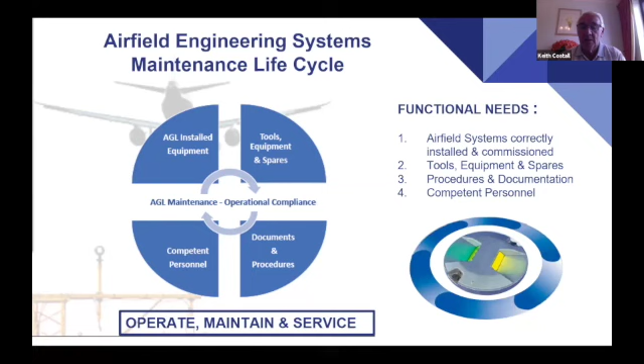Thank you for attending, and I'd like to thank Jeff. We're going to talk about a case study of Muscat International Airport, and I'd like to thank our CEO Sheikh Hayman and Abdulaziz, our airport systems manager, for allowing us to do this presentation and let everybody know what we do.

Just remember, Oman Airports actually operate 7 airports at the moment in Oman, all the civil airports. We're only talking about one of our airports, but this is basically the principle of all our airports. The first bit, what we're going to run through, are the topics we're basically going to go through in this presentation.

The regulator requirements - in our country here in Oman, it's CAR 139, Annex 14. That is our legal document. We're going to talk about our team - we've got a good team and we'll go through them. Some of the AGL tools that we use, which are critical for us to be able to do our jobs.

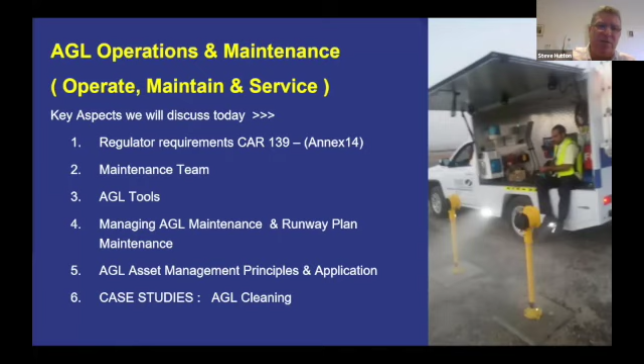Managing the AGL maintenance and our runway plan maintenance, how we do things, which we've changed from the basic principle we started out with 25, 30 years ago for assets. And the asset management system we use, the principles and how we use that to put everything together, which comes back to our documentation side later. A big bit on this presentation you'll see is cleaning, because that's actually one of the biggest jobs we've got - cleaning and making sure those lights are up and serviceable and up to standards.

As Keith has pointed out, I just touched on what he's mentioned - the AGL is important because it needs to be clear, it's actually visual cues. Very important, the cues for the pilots, making sure they see where they are on the runway. In low vis, smoke can be coming across, low cloud - there's many reasons why you'll have this, and it's very important that the visual aids are in the right place and working.

As the airport operator, it's our responsibility to make sure that's right. It's making sure the airlines and everything there is safe, so we can all travel from one place to another.

Okay, Muscat Airport. This is an outline of our Muscat Airport. We have the new runway, which was completed in December 2015, 4,000 metres, 60 metres wide. It's a code 4F runway.

So we have 747-800s come in weekly, Cargolux comes in, delivers, and moves on down to Mumbai, I think from Dubai. We have a resident 747-800. We have them regularly, and we also have the A380 coming in.

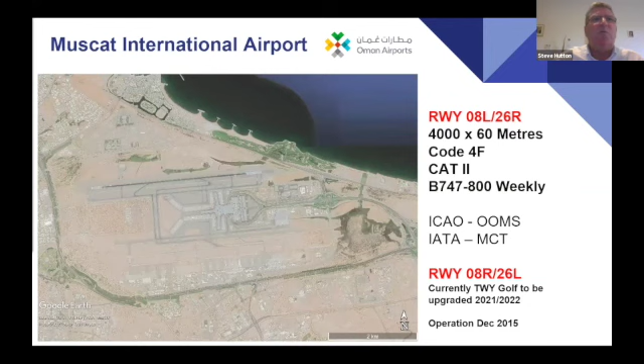This runway is planned, it's been converted to a taxiway at the current moment, and it will be upgraded because of things in '21, '22. So that's basically the runway, and our team looks after that and our taxiways.

Now let's go to compliance and all that. You'll see here, these are extracts out of the aerodrome manual. In there you've got to have your maintenance stuff.

Because of the size and detail of our airports, the complexity of things, we have a separate maintenance manual for all the maintenance we do. We pull that out, just put a brief description in the aerodrome manual, and all our detail sections are in there.

This is signed by our general manager, ADL, all the people go through it, and it's all signed, and the regulator goes through this. If we've got something not right, they tell us and we have to change it, and that's what we've done.

So clearly here, we just give a brief description. We have 24-hour, 24/7 operation, and we're just describing how we monitor in a very quick and simple way.

We have our airfield lighting control system, with individual lamp control on the taxiway fittings only, not on the runway fittings. On the runway fittings, on all fittings, you've got lamp fault monitoring on the CCR. So if one or two lamps go out, the current slightly changes, and we get an alarm come up on the screen.

On the screens here, we've got two screens: this one's the control tower, this one's where we've got the details of the CCR. Our guys can sit from the workshop and see everything that's happening on the actual airfield. They can see that, and it's all there as well, so they can do that.

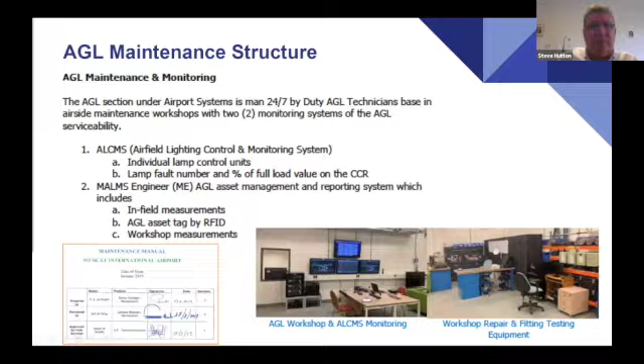Okay, our Muscat team. We have 4 AGL teams, each of 3 to 4 people. They mix around depending on who's on leave and everything like that. We have 4 shifts: A, B, C, and D.

We have 2 supervisors, and I'm very proud to say our supervisors were technicians. The company put some of them through to become engineers. They're now qualified engineers, and they've stepped into the supervisor's role, so they know exactly what's going on.

They've got that feel, they've got a good relationship with the team, and they all work together. The team are 24/7 coverage, 12-hour shifts from 6:30 to 6:30 on a daily basis. The supervisors generally are in the office during the day or out in the field, but they also cover nights. They've stepped in, and through this pandemic, we've had our supervisors covering day shifts and different things because of lockdowns. They are very versed, they know everything going on with the team, and they're an integrated part of it.

What our department or section does, we look after everything under Annex 14, including the apron floodlighting. Some of the boys think that's a pain at times, but every visual aid, we have to explain that to the regulator. So we take responsibility. That is the responsibility of our systems manager, and he delegates that down to the team.

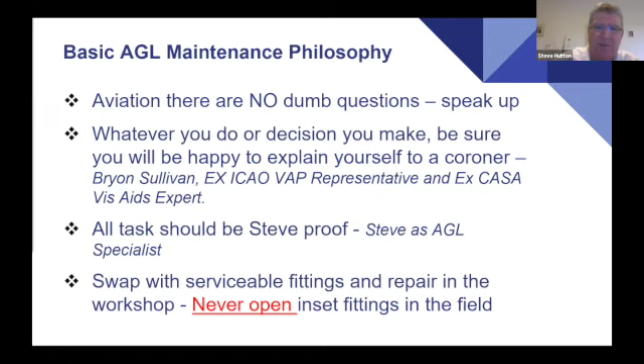The other bits we've learned over time, because we've had projects and contractors and consultants and management involved, we've had to learn some core terminology, and it's important.

Serviceability equals compliance. We talk serviceability, that the light is serviceable and it's up and functioning. The other thing we talk about is unserviceable - in one way it's non-compliant, but it means your fitting is not right or something's wrong. We keep it to those two terms and try to educate everybody that comes in. Just keep it to those terms, we know what it is, and we go through.

So what do we target our strategy at? Generally a lot of people will try and target about 70%. But what I've found is if you target higher, you'll actually do less work in the long term, because you're catching things before they get worse. At 80%, it's generally cleaning - the biggest thing in keeping your runway serviceable is keeping it clean.

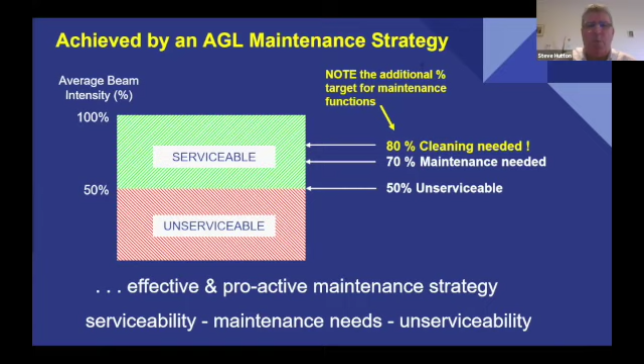We have a number of factors, we'll go through that in a moment, but that's what you need. Cleaning is the big bit. The electrical side is a small part, but to keep it serviceable, it's the cleaning of it.

Our AGL maintenance planning - so coming back here, the AGL preventative maintenance is based broadly on a monthly technical inspection. We're the technical guys, our ops guys go out there and have a look if there's something in between. When we go out there, our boys are checking that it's technically right, running and functioning correctly.

So all our services are generally checked across the board every month. We go through every calendar month and check it. However, our runway and stop bars are done on a weekly basis because they're critical pieces of the system - the pilots rely on it. So we do inspections and record them, where the guys go out and go down the field to have a look.

They will generally do this in their workshop vehicle, and if they can stop - which we do have more these days - they can go there, fix the light, correct it, record it in our asset management system, and move on.

This is all included in our maintenance manual, which provides the general details of what we do, and it all follows from there. So your team has got to know what your maintenance manual is - your regulators will ask you these questions, so you've got to make sure they're familiar with the maintenance manual and go from there.

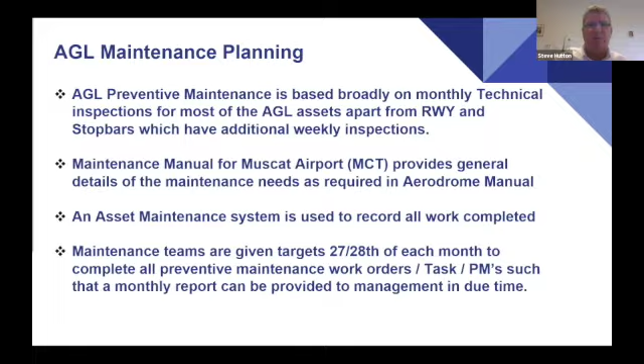We can then talk to management. Okay, the monthly tasks - visual inspections. The boys will go out and do a visual inspection. You need to go out, drive around and have a look at it.

We run two visual inspection types - we have a runway inspection and we also have a stop bar inspection. The runway inspection, they go out, run down through the approach lights, go onto the runway, check the PAPI and then drive down the other end. So we go from approach light to the runway end on the whole runway and we record any defects, any lights outage, anything there. They can swipe that and record it into the document.

It usually takes around 7 to 10 minutes. If there's a few issues, it'll take longer. They can also do the lead-on and lead-off lights and record all that because they're critical, they're part of that runway. The lead-off lights, you've got to get your aircraft off the runway. So those things are all sat there and they can record it and we document it.

The other thing we do in our monthly task is an infield measurement - we do our infield measurements of the runway and the stop bars every month and we record that and document what they are. If the service is not 100% or there is something there, the boys will go out and correct it and then record that it's correct. So there's a document showing - because one thing the regulator always asks us is how do you fix things. Well, this is where you're able to demonstrate this is where we found it was faulty or not serviceable, and we've corrected it in 2 hours, 4 hours, 2 days, whatever the appropriate reason. So it's there, we do that.

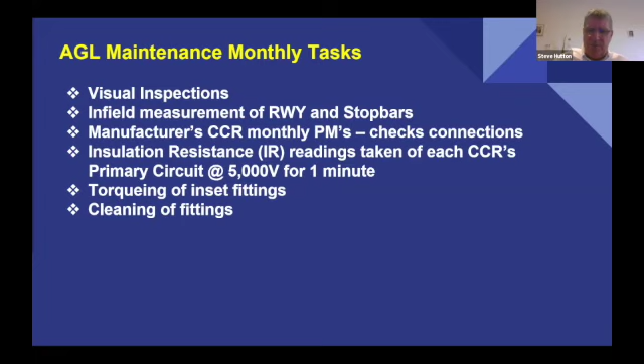Cleaning, as I said, is the big job on the whole lot - cleaning the fittings. Because we're in the Middle East, dust is a big problem for us. Very surprising, the dust builds up very easily, on our cars and everything around the place. So the boys go out and clean everything. We have a couple of photos.

The other thing is rubber - rubber on our centre line and TDZ. And the one thing a lot of people forget is the lead-off lights, which get a lot of rubber build up. We've now bought a new machine to deal with that. It was being done by hand, but the results look a lot better now because of the mechanism we're using for rubber removal. The boys can go out nice and easy and do that.

The other big thing a lot of people don't realise is the fittings - your inset fittings and even your elevated fittings. You'll get moisture inside the fitting, which puts a fogginess onto the glass lens, and then you've got to clean it. So your light deteriorates - we see the light deteriorating and your readings going down. If you clean the fitting, it fixes it.

When I was at Sydney doing the runway there, we just swapped the heads. The elevated fitting, we just swapped, put a new head on top of it, kept the original lamp, tested it, and that was fine. We'd pull them back, pull them apart, clean the bullseye to increase your 10,000 candelas. If it's an inset fitting, we crack it open, clean the inside of the lens and the dichroic filter, and sometimes the back of the reflector if it's a reflector lamp. Give that a clean and wipe, build it all up, and put it back together.

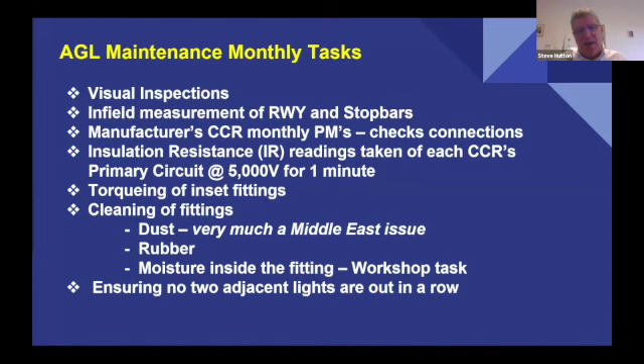We're conscious of doing that, and we tackle it on a weekly basis - the guys are doing it weekly, or just less than a week, because they're doing 4 days on, 4 days off, with 2 day shifts and 2 night shifts. So they're cycling through, doing the inspection down the runway on a regular basis - it's done a couple of times actually on the runway. Each shift does it, and we make sure it's covered and we're right there.

All the tools we get from the manufacturers are useless. Because of the dusty environment, we use a battery-operated Makita air blower. We recently got the new powerful one, which seems to blow a lot better.

We're finding that's good for blowing water away and clearing ducts, so the boys have been doing that. With a paintbrush, you can sweep around the base of your shallow pot and the lid to get the dust out, so when you're putting the fitting back in, there's no dust or anything loose. We also use rags for cleaning.

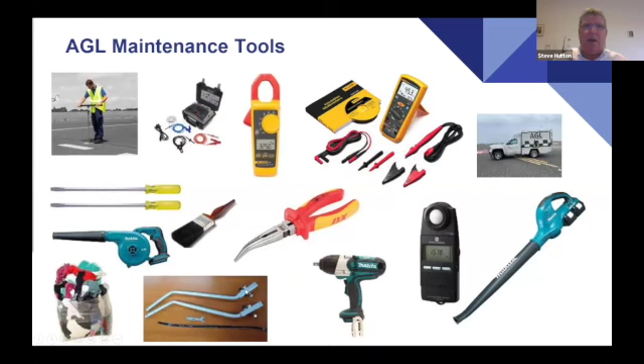And of course our lux meter for the apron floodlighting meter task. So these are some of the maintenance tools.

To the right there is our AGL workshop vehicle. You'll see about a third of the width of the van is a workshop bench. We look at the appropriate tools - the yellow thing on the right hand side is a Karcher blower for cleaning the lights.

We have a hand washing basin in the vehicle. You'll see on the centre taxiway line there, the tech is undoing it - we've got it on a 1.2 metre extension, undoing the nuts. We're conscious of HSE and backs - bending over and getting low, we find this is easier, as well as having the torque wrench on the long extension. You've got to look after your staff and think about the back mechanism as well.

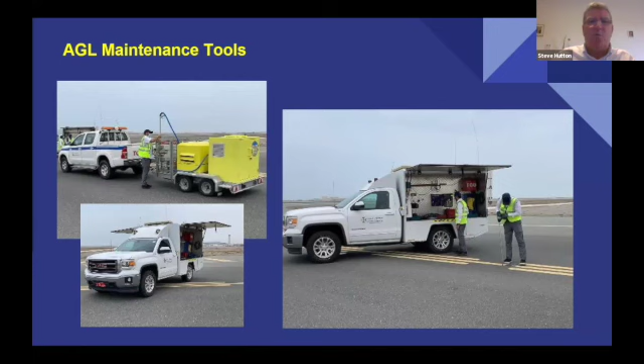We also have infield measurement equipment, so we can go down and measure our lights and get that information and data - the inset, the elevated, and with the transverse we can run across and quickly do thresholds and stop bar lighting.

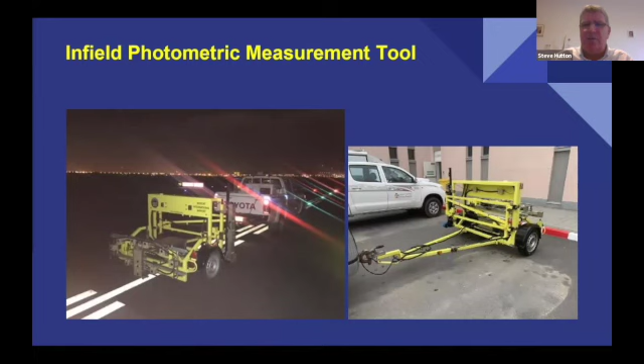Okay, now on to the cleaning. We clean the approach, the runway ends, the runway centre line, the TDZs and such. You'll see that Hitachi with the blaster - they blow and wash the signs or whatever.

The guys drive around on the vehicle - they sat down instead of getting out of the vehicle and back in the car. They've developed a way of doing this and moving around. We followed this from our guys in Salalah - this is how they were doing it, so we adopted the same approach through the airports.

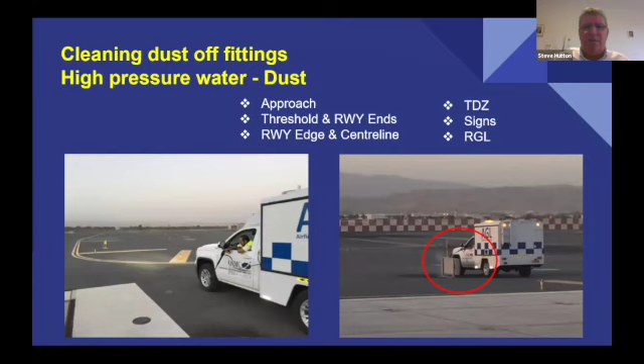We also do the elevated inset fittings - we run along slowly while they do the cleaning, and we've got rubber removal out there cleaning the rubber off the lights. The rubber removal for the runway does not touch the light fittings - they drive around it just to make sure they don't damage it.

Our civil guys have got a little bit of fear, but we're happy, and we clean it so we have no issues with that.

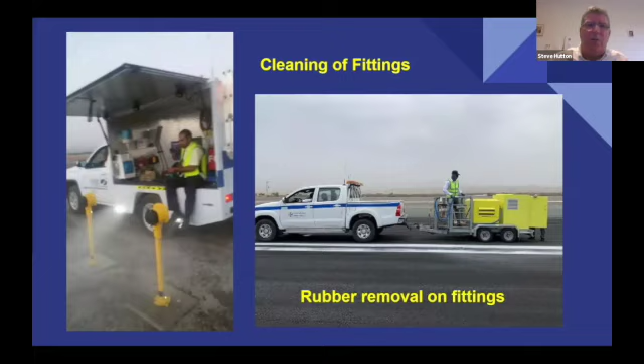Of course, you always have reactive work and whatever - you may have to go out and fix a broken cable, low resistance, or whatever. So here's the team in the old part of the airport repairing some cables where we had an issue and modification needed.

You'll see the AGL vehicle has got a cover, which gives the boys shade. If it's raining or whatever - we don't get that much rain - it gives us automatic shade so we can get in there, and it does make a hell of a difference.

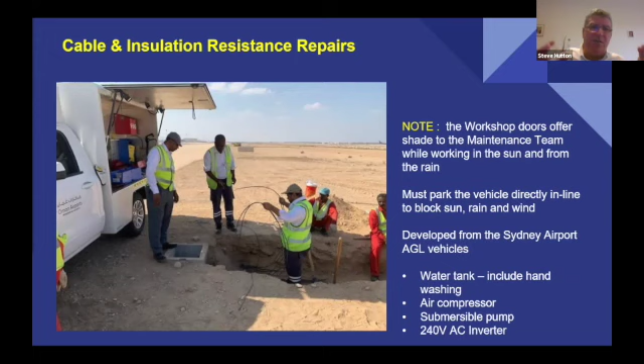Our vehicle has got a water tank for hand washing, air compressor, submersible pump, and 240-volt inverter. So our vehicle is used and sits there and tackles it, and we're ordering another one. Management have said we can have another one, and they're in the process.

This is the other side. We have the trays where all the light fittings are stored. We keep just enough for what the boys will need so they can go out, as one of the guys, a foreman at Sydney Airport, used to say, at 2 a.m. in the morning you can't go out and buy everything. So we make sure we have everything in the vehicle. The guys go out and do the job once and go back out.

Prior to the pandemic, we were quite busy. We had small slots - through the midnight you'd get a half an hour slot. So we made sure everything's there, and we do that. This philosophy has worked for us quite well.

Our contractor who was doing the project upgrade works got one as well - we made them do it. They can lock the door. The beauty there is they put the thing in, shut the door, and they can vacate. You're not worrying about tools falling out and everything.

One big problem we had with contractors was them just throwing that in, so we made them do a workshop. So there's another concept - it's just a box on the back of the Toyota, and they just shut the door, same principle. One side is the workshop, the other side is the drawers with their bits and pieces. And if you open up the tray in that one, they've got a big tray where they were carrying all their transformers.

The other one is reactive maintenance. You always got to be ready for your reactive maintenance. Reactive maintenance can be different things - as you can see here, we've got a damaged base. The question is, do you have a team that knows how to replace things?

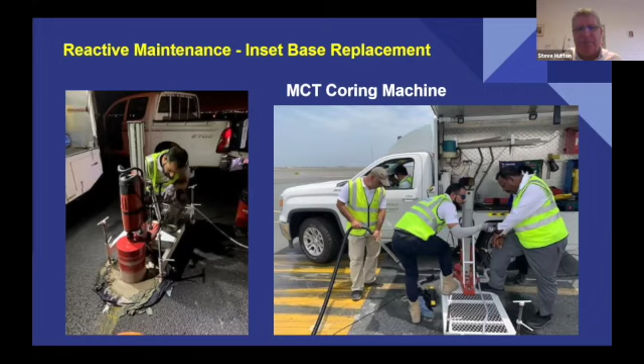Another big thing you've got to watch for, reactive maintenance, is a sign blowing away. We found the sign one morning during an inspection, a supervisor's visual check. A 747-800 cargo plane came in about 4 or 5 o'clock in the morning and blew the sign off. The clips on there are a bit weak, and if they're not adjusted, they slip after a while and come undone. That panel was found to the side, so we had to get in there.

The beauty was we called the team, they were just finishing another job, it took them 5 minutes to finish, then they brought the vehicle and we had everything there to do the job. Luckily this was during our runway closure, so we were able to fix it and get back in service without any major fuss, completely done. But that's because we organized. You need to be organized and make sure you've got that covered.

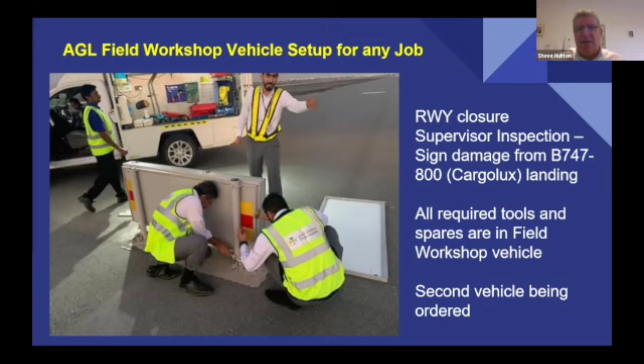One of the big things here is whether your team is familiar with being able to repair a PAPI or anything else. What scenarios have you put in place? What have you got in the case?

Here you can see another sign with burn damage. I think that would have been after an Emirates A380. We had a few problems with that in the beginning — you get the big boys, you get a bit more impact.

We were lucky on this occasion that ATC were able to turn the runway the other direction for aircraft to land. They shortened the length of the runway so we could get out there. If it was the main bit, we would have either had to hold and divert aircraft, or they would be landing on that and it would take us a little while.

But we had the two shifts, they all did it nice and easy, went through there, had their piece. One did one job, one did the other, put it all together very nicely. In around 30 to 40 minutes it was all done. We had the boys sit down and discuss it before going out, a toolbox meeting, and they had a plan and a strategy to go out. We completed it and got that sorted out.

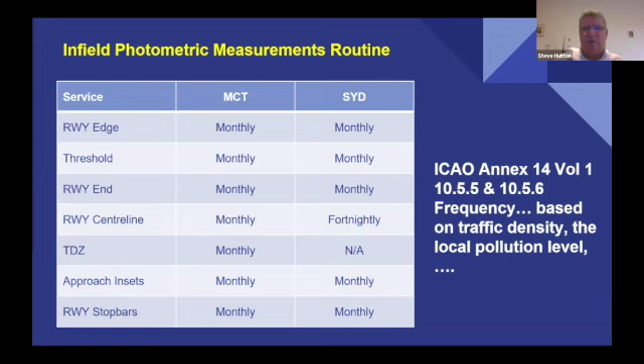At Sydney, when I was working there, we used to do the centre line every 2 weeks because it was getting more aircraft movements and rubber build-up, and we found between 12 to 14 days it would become unserviceable. So we adopted a system every 2 weeks: go in, service it, clean it, then photometrically test and improve it. We were testing it first and found it was failing all the time, so we just went in, cleaned it, and then tested it, and that worked. We did that for 7, 8 years — that was the routine, and I'm quite sure it's still the routine there.

The other bit when you're looking at it, which I've found using an infield maintenance system, is the inset fittings alignment will generally be okay because they're set, unless the fitting moves a little bit from pavement movement or whatever. But you generally don't have any issues with that.

Elevated fittings, yes, they come out of alignment on a regular basis. But if you're using an infield measurement system, it will tell you if the alignments are out. If you run a report regularly on a monthly basis and check the alignment, it will tell you if you're out of alignment. So what we've found is if you use this tool, you don't have to go out and check every fitting, because you're getting a report that's right. And if you take the philosophy that when you touch a fitting, you do an annual service - you look at everything, the glass, everything on there, nuts to air.

Just do that every time you do the fitting. It will be less work, not another task of just going out there to maintain it - do the whole lot in one go until the next time you come back. If it's not sure, replace the components. You should have that in the vehicle. Go and do that. Infield measurements, gentlemen, will tell you lots of things of what's going on, and it will reduce your maintenance by a long shot. Really does. It makes it a lot simpler. I encourage you to do it on a monthly basis.

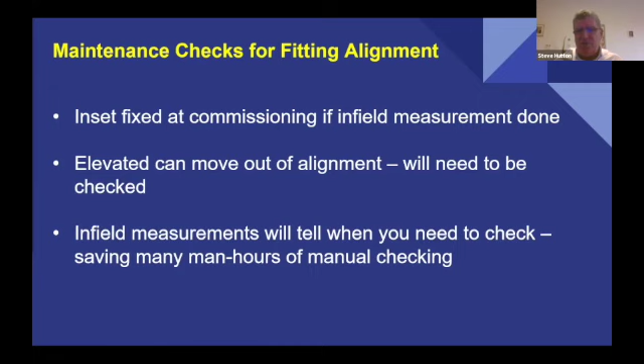One airport in Australia used to do it every 6 months. That was a big job before - they'd go and clean it all up, a lot of hard work, but a couple of weeks later, it was going to be out of service. If you get the tool, I recommend the tool. It is worth every cent of it.

Moving on, not much more to go, gentlemen. Infield measurements, okay. The other bit with the infield measurements is it will tell you a lot of information. And if you look at it and study it over time, or get into the right training course where people learn and discuss this - this is a topic on its own. But there's a lot of different things: you've got water ingress, electrical issues, transformers.

You can pick up a lot of information from your photometrics, having it clear and looking at that. So the photometric measurements is not just one thing - it's a lot more information that can be utilised. And you can identify various different things, especially when you're starting out. You will find all different things.

I remember on one airport, we couldn't get good light output. We found out it was the secondary was too long, so we increased it from 2.5 millimetres squared to 4 millimetre. Problem was solved, right? We're trying to work out why.

Electrical, there's a lot of things here, and you really need to know where it is. Go through the little checklist. But your staff need to be trained - they'll sit there, and if you don't train them properly, they won't know how to quickly address the issue.

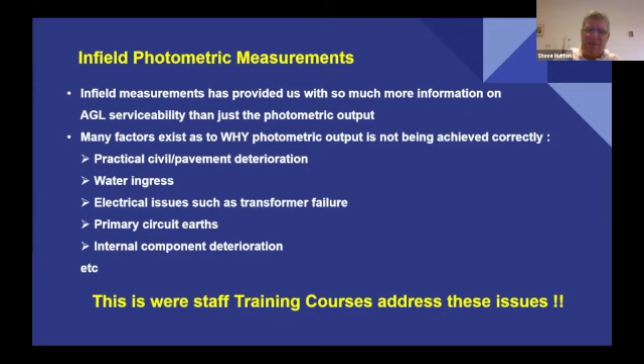So coming back, the whole principle that we've been doing at Muscat - I follow the differential maintenance strategy. Basically, you don't know what you've got unless you measure it, right? You measure it, maintain it, monitor it, manage it, move it around in the loop. It's a circle - just keep going around in the circle, go out there and have a look at it.

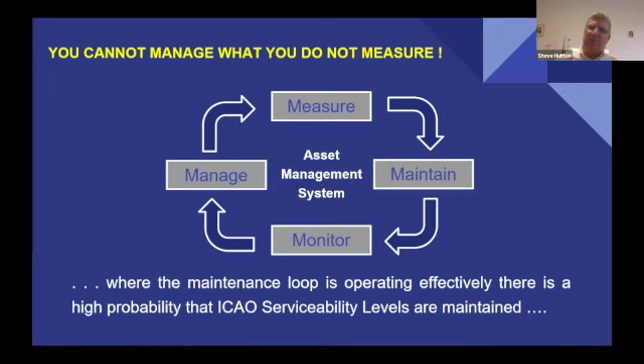And if you do it more regularly, it'll be easier. If you're doing the cleaning, I may only have 10 fittings to be cleaned if you did it every week, or 20 fittings every 2 weeks. But if you're doing it every 6 months, you might be cleaning the whole lot and it becomes a big job. And no one wants to go out and do a big job.

The longer the rubber's on there, the harder it is to remove it. If you're removing it on a regular basis and cleaning, it's a lot easier. It really does make a big difference. I remember when we started cleaning the centre line at Sydney, it was a horrible job. But eventually we got it down to a regular basis every 2 weeks, and it became an easy job - nice and simple.

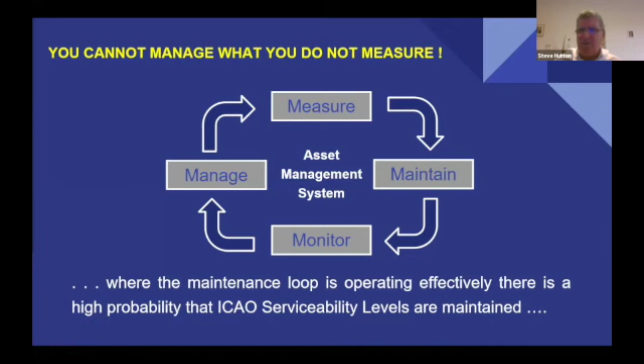The crux of the whole system is your asset management system. A good asset management system pulls all of your information together in the data. With the technology today, you can bring that together. It produces the reports, demonstrates your serviceability, and gives you justification to your management and your regulator. It's a really key part.

For Muscat, it serves as a method of demonstrating operational compliance, specifically in the event of an incident or accident, but also highlights when immediate rectification action is required. It will tell you that.

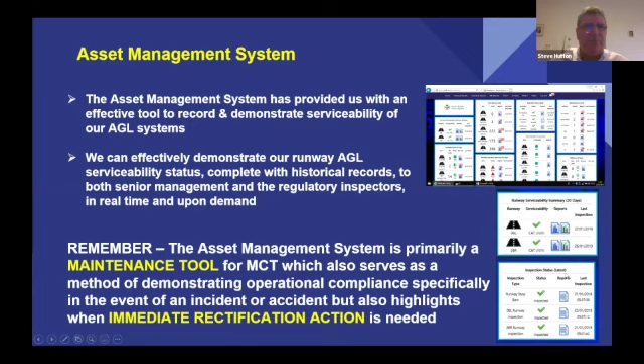We use this detail, and it's being a big bonus for us right at the moment.

The infield measurement bar chart configuration is an important thing. Typically, an asset management system demonstrates in real time the full maintenance history of all the light fittings in the system, and all AGL lighting circuits. So we have everything, and it helps us with maintenance planning. The planning's not so much needed because we do it on a monthly basis, so the individual teams just need to do it. But it demonstrates the appropriate rectification action, and this is the big thing.

We can find out when it was done, by who, and on which shift. If we have a question, we go in there and find out it was shift C, shift D, or whoever did it, Jamal, Bada, Sud, Vasso, whoever. We go through, get an idea of what's going on, and you can make a phone call about it.

And also at a low resistance, as you can see here, a resistance chart. We can see what it's doing, it's getting up and down. Why? We can investigate it.

This one here is a chart of our faults. It tells you a summary of where the faults are, what we've got. We've got a lot of taxiway fitting faults there on the summary, and maybe one out on the stop bar overall. I picked a bad one, generally this isn't typical. If there's been a break after holidays, things might be a little quieter, but that's what it does. The boys all know, but it's still serviceable, the red doesn't mean unserviceable, it just means we've got work to do.

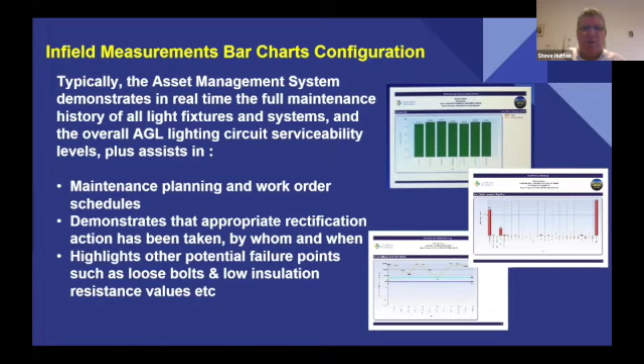So management says, yeah, we're doing the job. This report, this overall summary, is all regulators, operations and management really need to know, but if they want more, you give them more. This one picture is what we walk in with, and Abdulaziz, we want to see this chart here, it's got all the services on the runway. The only thing not on here, which we'd like to see, is the stop bars as well, because that's the other critical one we have to produce for the regulator in chapter 10.

Here we got all our things. If it's Cat 1, this is for Cat 2, we have a Cat 2 runway, it's telling us Cat 2. If it's not, we're not getting 95, we're only getting 85 or 90, we'll get a yellowish colour, and that will tell us we've got something there, we have a look. If there's 2 lights in a row, it'll go red. It might say 95 or 94, but it'll come up and say 2 lights in a row. It works that out.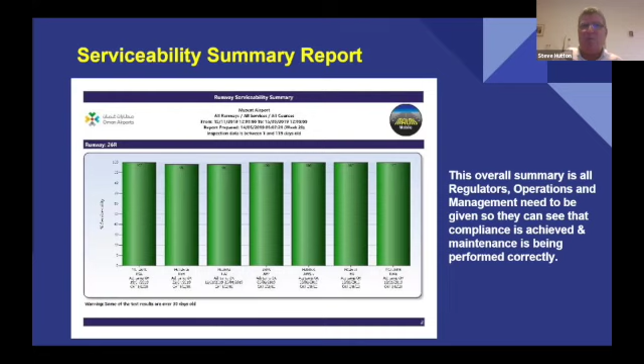That's what I say, keep it simple. This ink is very Steve-proof, sorry to go there, but we keep it and we have a look at it. Every month we produce that and we have a look at it, and it's cyclic, we do this every month. Each of the servers comes through, so you'll find there'll be a day or a slip down or whatever, but we recycle through the month and each circuit is done. So if the team does it on the first week, second week, third week of the month, they choose that. But at the end of the day, this is what we're looking on - by the 27th everything's done. If something's not right, we get out there and chase it and fix it.

Asset management tool. Okay, it reports when the boys, here they got RFID, we scan the RFID and it comes up and it'll report if the light's not illuminated, it's been repaired, defect. We've used this as a defect thing, recording defects against our primary supplier, because if we get a fault, we can mark it as a warranty issue, and we can simply print that out and it's very easy for us to document it.

The other thing with the kit, currently we're running on a laptop at the moment, and once we get it on the server, the boys get it on the server, you'll get access anywhere. We don't have that at the moment, but once we do, supervisors and management can get in and have a look at it, and we can maybe find the problem without having to go out. Another saving - don't need to get out on the runway, not bothering ATC. We're not going to be another runway incursion or whatever it is.

Here, one of the boys has come along, stop bar. When we do the stop bar inspection, I think it was Salman and Azar said one day, why have we got all these PMs for this? We go and do this week, we go and do this week. So we sat down and we came up with a new system where when they go to the stop bar, they're doing the sign, the stop bar and the runway guard lights all at the same time, and also checking the lead-in light and lead-off lights, and they check the functionality of it. All of it's done, so when we do an inspection on that later, click it, it's all okay and fine.